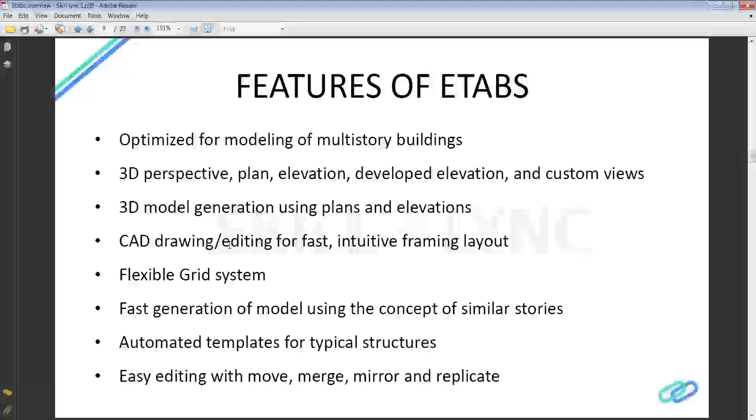Then how to become a structural engineer? Everyone will be knowing this. We have to finish the Bachelor of Civil Engineering and/or a master's in structural engineering. And these are the features of ETABS.

There are a wide range of display options available in a single window also. You can check the plan, elevation, and 3D model in a single window itself. All those things will be explained later. And the next is a great feature: import grids and CAD objects. I can say this is a wonderful feature in ETABS, because if you're going for asymmetrical complex plans in a structure, these can be imported directly from AutoCAD or CAD.

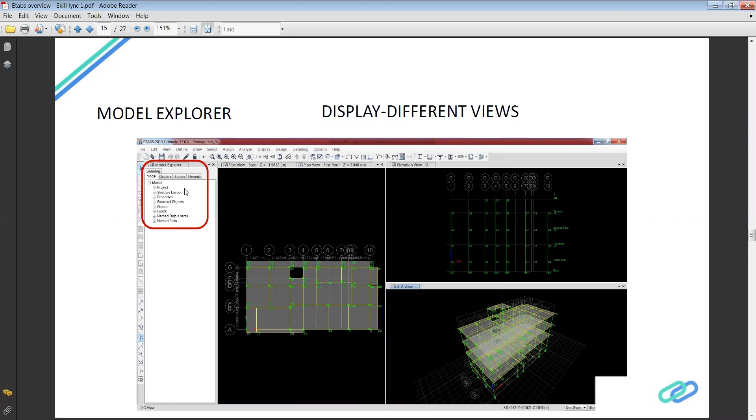And the next one is the Model Explorer. The Model Explorer is the one you can see here, with the project structure layout, properties, whatever you want to define. After opening the program and going for the import, you can open the Model Explorer and use it here to define all the beam and column sizes, whatever is needed.

And then there is the preview option. You all know that preview will help to see whether our work is going well. So the live preview helps you to verify the effects before any modification in the model. If you want to change any beam sizes or any loads, you can just keep the preview on and see whether the changes are reflected in the model, and then you have to click Apply and click OK. So the preview option is a good one.

And the next one is the curved beam area, because all the software will be giving straight and rectangular or square ones. In ETABS, curved structures can be done easily. So this is a small curved one I have shown here, which was done earlier. So the curved beam is also a good feature in ETABS.

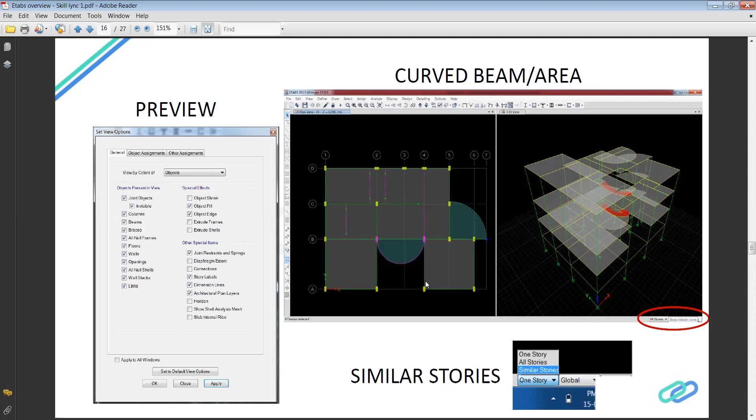A similar story option will be there. So what is similar story? If you are going for more stories like 20 or 30 floors, and the 5th, 6th, 7th floors will be the same, you can use similar stories. So if you want to change a load or beam sizes in the 6th or 7th floor, this will be reflected in all the similar stories. That is how similar stories are helpful in ETABS. And then it's the model alive.

Model alive, in the sense, if you want to see the deformed shape, you can just click on the model alive. If you want to remove a column or beam, you can just do it like that. If you want to remove a column after modeling, this model alive will help you by showing you the deformed shapes.

So if you are having 10 floors and there is an obstruction, if you want to remove a column in the 5th floor, you can just remove the column alone and use the model alive. This will show you the deformed shape, whether it will cause a problem in our structure or not. So this is also a good feature in ETABS.

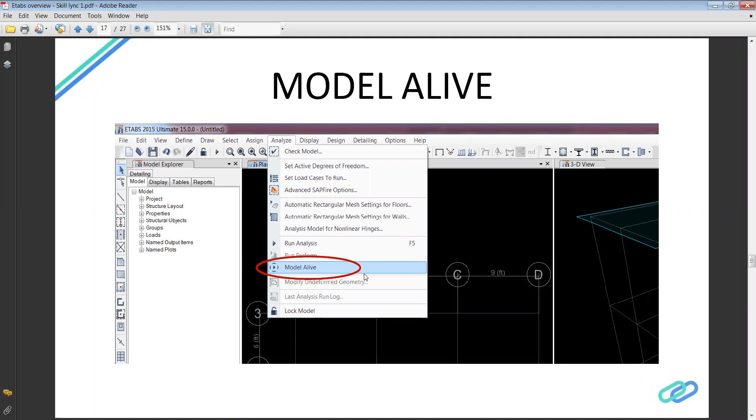And next to that is structural design. Before going to the design, these are the prerequisites we need: selection of structural system. What is meant by structural system? After getting the architectural plan, we have to decide where the column should be, where the beam should be, like that. That is the selection of structural system.

And next to the structural system, we have to calculate loads using IS 875, IS 1893, like that. IS 456 is the basic code for concrete. Using these kinds of codes, we have to calculate the brick wall load, slab load, column load, like that. All these loads will be covered in your main course. And next to that is the analysis of structure using ETABS.

And there is a vast difference between analysis and design. Analysis is totally different from designing, because we will mainly be doing the analysis in the ETABS software. Analysis will give you the reactions, forces, shear force, and bending moments. Using the forces and reactions, we'll be designing all the elements. Next to that is the submission of GFC drawings. These are the basic steps.

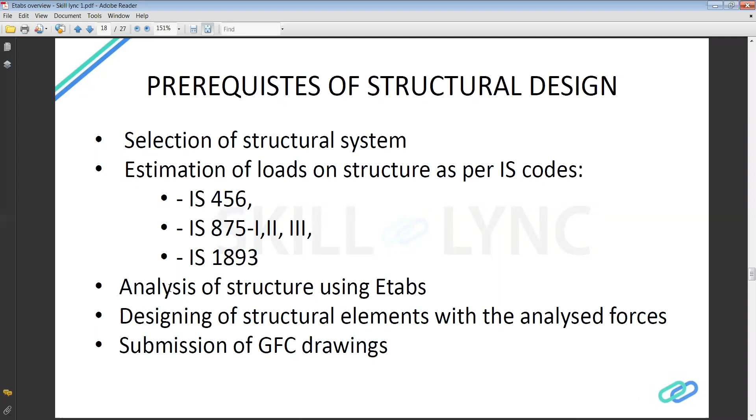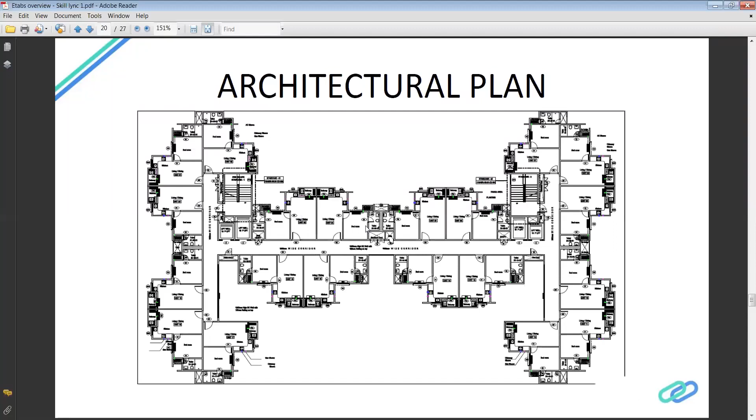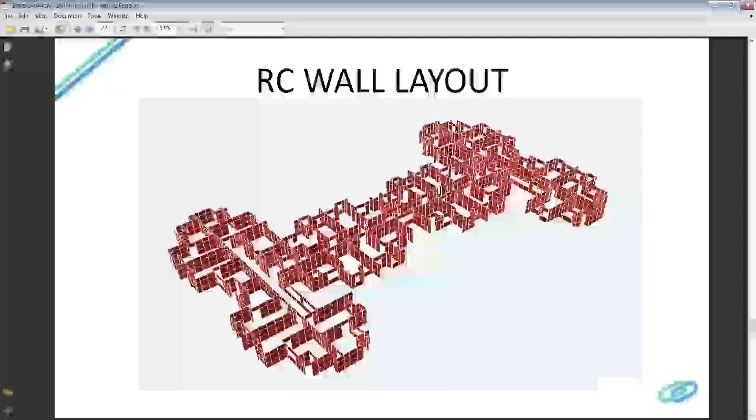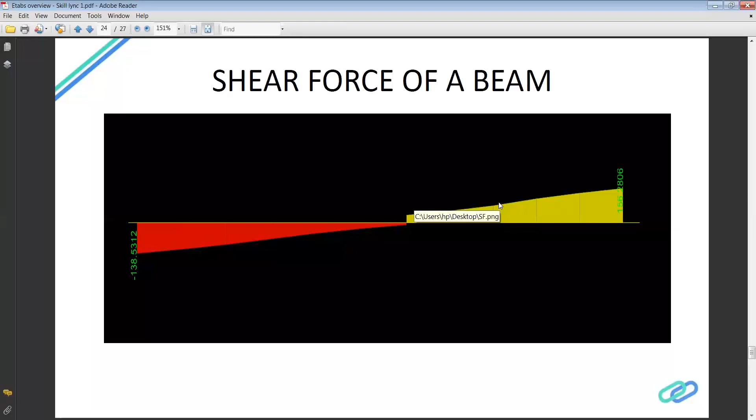What I recommend is, being civil engineers belonging to a core branch, how do you stand out when it comes to placements or interviews? How do we grow, and how do we adapt to the current job market? We have to update our skills and experience in technology. ETABS will help us outshine others in the field. That's why I suggest ETABS training for students at college level itself.

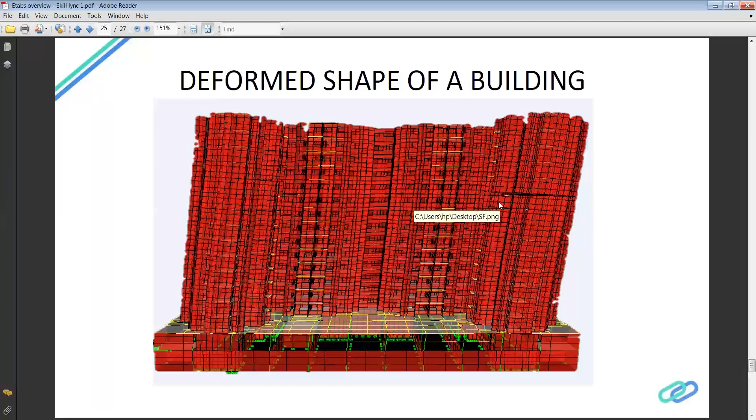I think we can cover more topics in more detail in the main course, like detailing, modeling, analysis and design. Everything will be shown in detail in the main course itself. And so I think we have come to the end of the session. I've covered it in a short time.